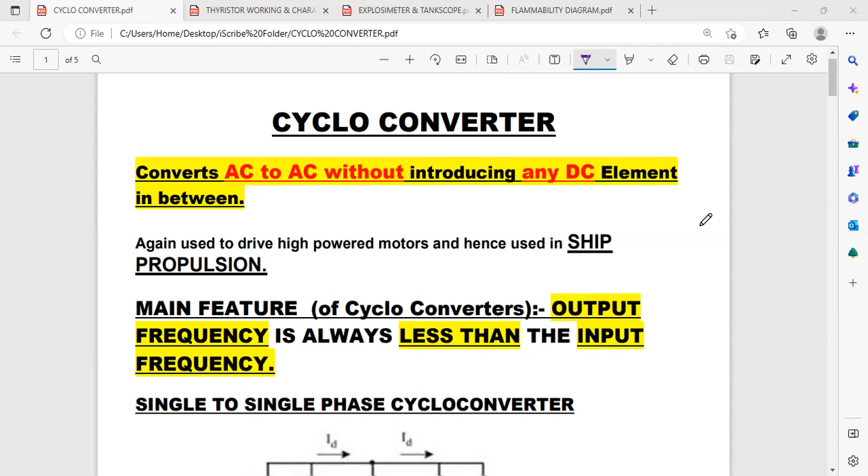Right, so a very quick recap on the cycloconverter we started yesterday. As I said, there was just one small portion with regard to a question, we'll come to that, but let's have a quick recap. A cycloconverter is a synchro converter, but without the DC element. You're converting AC to AC. And when you have a cycloconverter, the output frequency is always less than the input frequency. The two types we discussed were single phase to single phase.

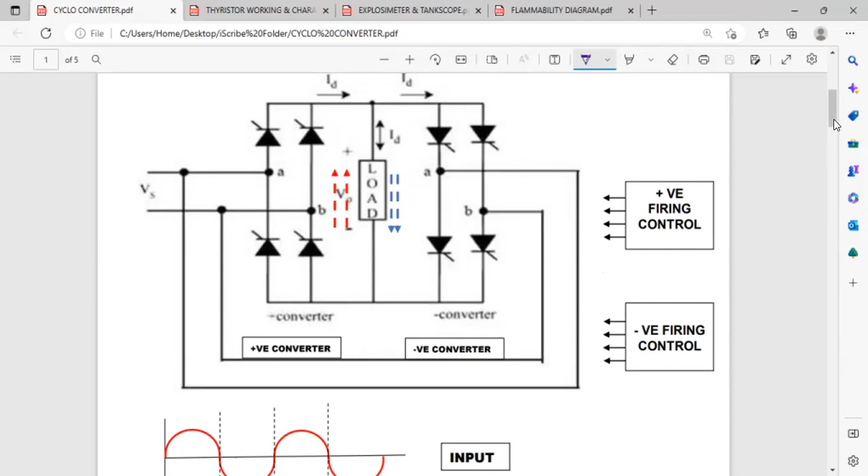Here we saw how AC was converted to AC without any DC element, and the output frequency was half the input frequency. We were getting only one cycle of output compared to 2 cycles of input. So we were getting half the input frequency, meeting the requirement that output frequency is always less than the input frequency.

Then we saw the 3-phase to single phase converter. As I mentioned, this single phase is one phase of a 3-phase synchronous motor - U, V, W, there are 3 phases in a motor. So it pertains to one phase, and 3 phases are then converted into one phase. Yesterday I showed you that you're going to have 3 such similar circuits, one for U, one for V, and one for W phase.

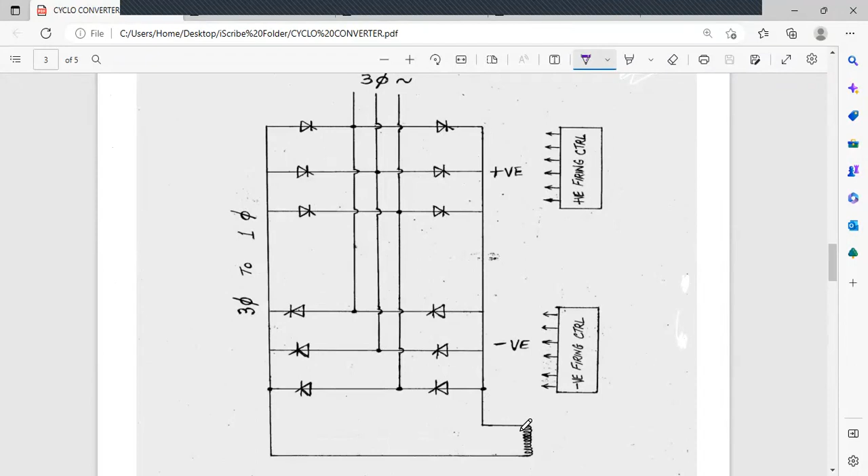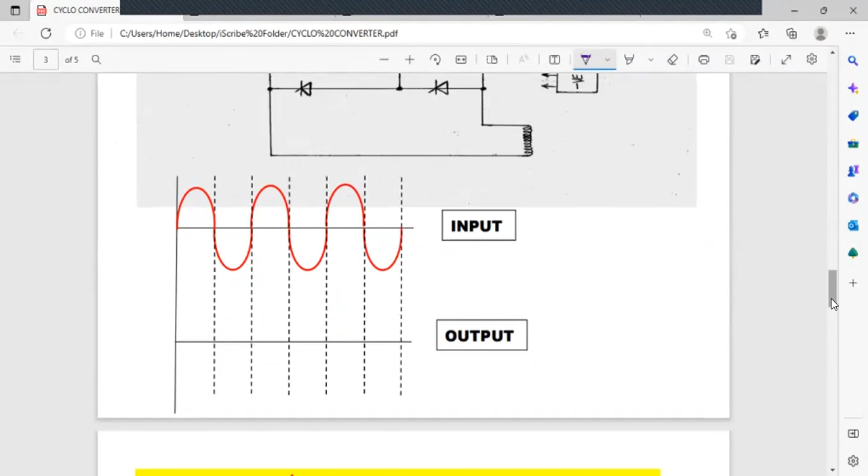Yesterday we also discussed how current flows first in one direction and then in the other direction, resulting in one output waveform as opposed to 3 input waveforms. So the output got only one cycle as opposed to input having 3 cycles, and therefore the output frequency was 1/3 the input frequency. So coming to those questions, yesterday we discussed what is the blocking mode.

If you remember, I said that when your positive converter is firing, your negative converter is blocked from firing, and when your negative converter is firing, your positive converter is blocked from firing. If you allow both of them to fire simultaneously, you would have a direct short circuit. That is what is meant by the blocking mode. Very simple to understand.

And I retained this one for today because it requires a little extra explanation for you all to understand - how we get this so-called internal circulating current, or circulating internal current of a cycloconverter, or for that matter any converter, even your synchro converter. We'll come to know the reason why.

We saw that we were using thyristors. In your synchro converter, three-phase was converted into DC, and then that DC was converted back into AC, again using thyristors. Even in your cycloconverter, we were using thyristors - the positive converter and thyristors for the negative converter, for both single phase to single phase and three-phase to single phase.

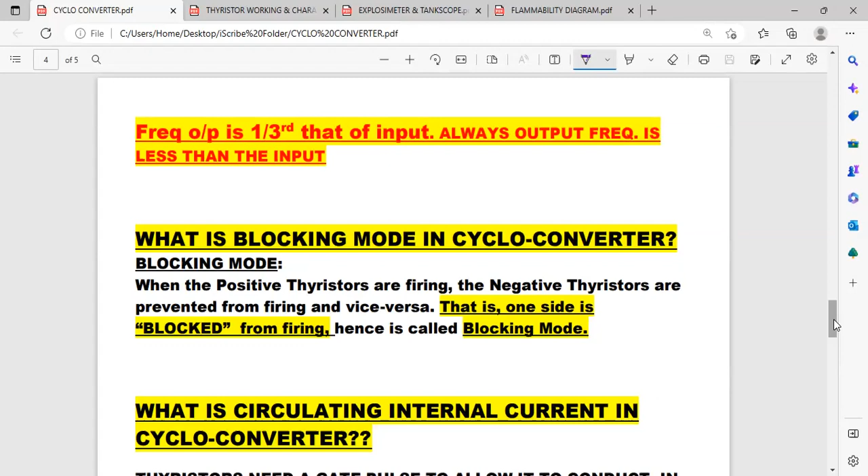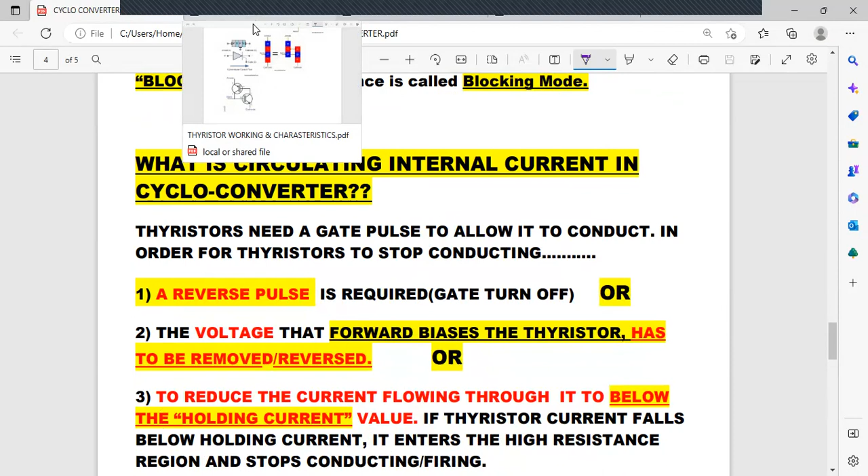Now, to understand what this internal circulating current is, we need to know what things are going to stop a particular thyristor from working. So let's digress to the thyristor. A thyristor is denoted by this symbol - you have the anode, you have the cathode, and you have the gate.

A thyristor will conduct as long as you have positive on the anode and negative on the cathode, just like a diode. But this thyristor is not going to conduct until you get a gate. Then afterwards, if you remove the gate, the thyristor will continue to conduct.

Unless you're getting this gate, in other words, this transistor gets forward bias, that will automatically forward bias this other transistor. Why? Because this collector is connected to the base. So once this transistor gets forward bias, provided there is a gate, this one will automatically get forward bias too.

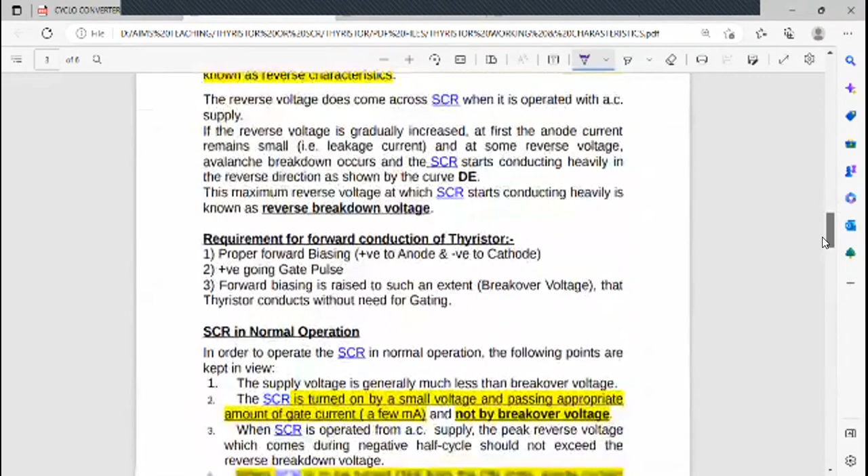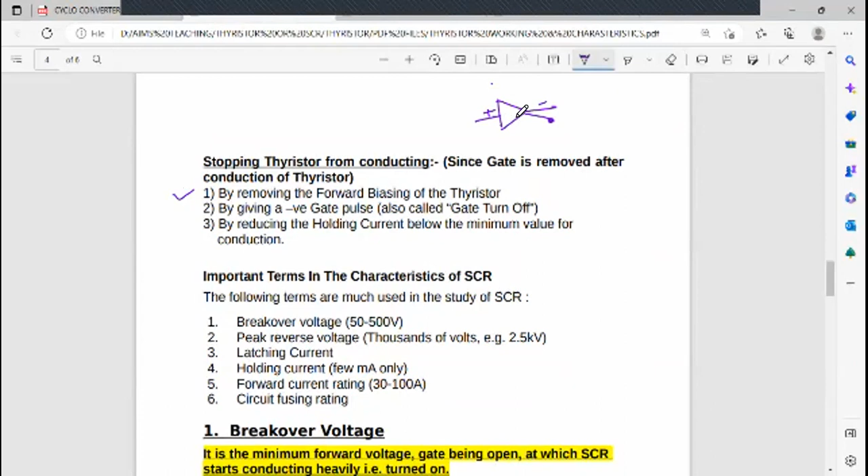Methods of stopping the thyristor from conducting. There are three methods. Number one, by removing the forward bias, that is the positive and negative I told you about. Here's the thyristor, and this is the gate. If you remove this bias, the positive and negative, the thyristor should stop conducting, no matter whether there is a gate or no gate. If you don't have forward biasing, the thyristor should not conduct.

By giving a negative gate pulse. Now we saw from that particular diagram that this has to be a positive because it's NPN. And as I said, this transistor has to conduct first, then this transistor will conduct. So this will have to be a positive gate over here for this transistor to start conducting.

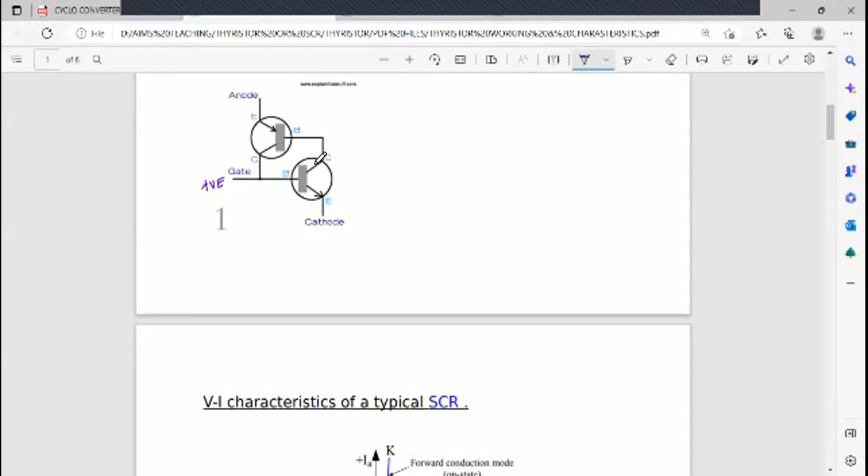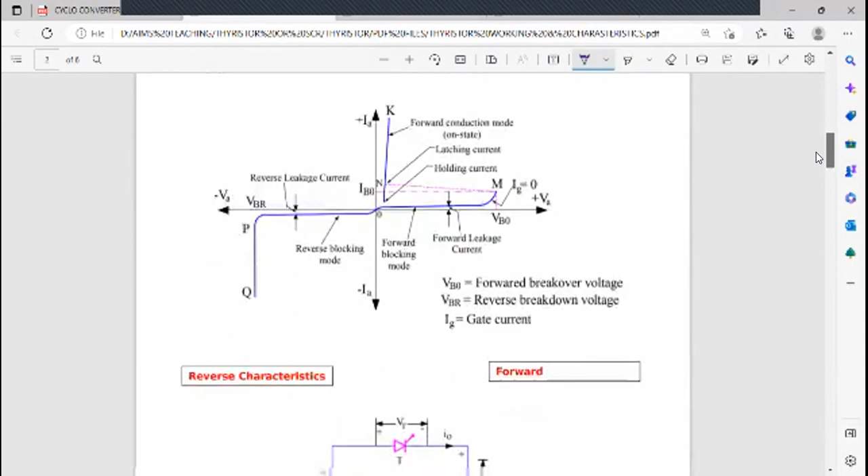A way to stop this transistor from conducting is to take off this and put a negative gate, and that will turn off that particular transistor. If that transistor turns off, then the other one automatically turns off too. So that is called a negative gate, or gate turn off thyristor. That is the second method of stopping the thyristor from conduction.

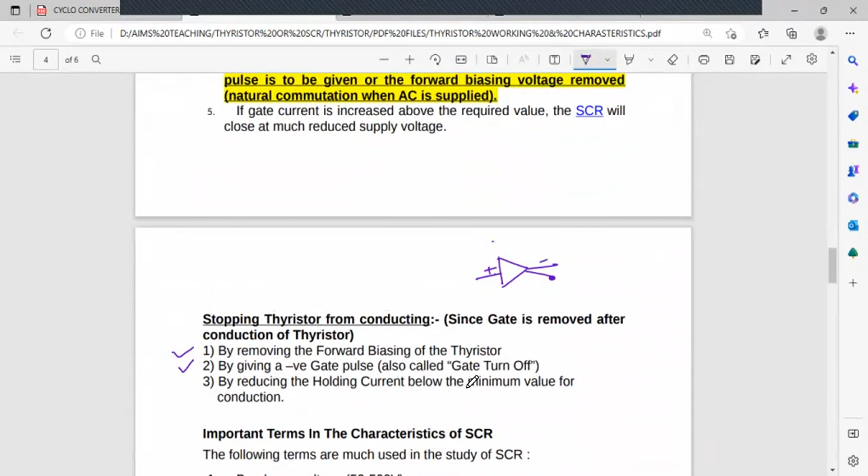The third means is by reducing the holding current to below the minimum value for conduction. Let's go to this particular characteristic. This is when the thyristor will conduct if you're going to force it to conduct without a gate. So what are you doing? You're taking it to a very, very high voltage. And as you know, even if you take a diode to a very high voltage, it is certainly going to start conducting.

Instead of taking it to a very high voltage so that it can conduct, we can make that same thyristor conduct at this particular point. Let's say this was around 1000 volts for it to conduct normally. We are using this, say, at about 100 volts roughly, it depends from thyristor to thyristor. At 100 volts, you're providing that gate, and by providing that gate, you're making the thyristor forward biased and thus conduct at a much lower voltage.

This particular voltage is called the forward breakover voltage. We are not interested in that; we are interested in this, thus making the thyristor conduct safely. There is a possibility that your thyristor can get damaged, and therefore nobody does that. So what did we say? We can reduce the forward bias voltage.

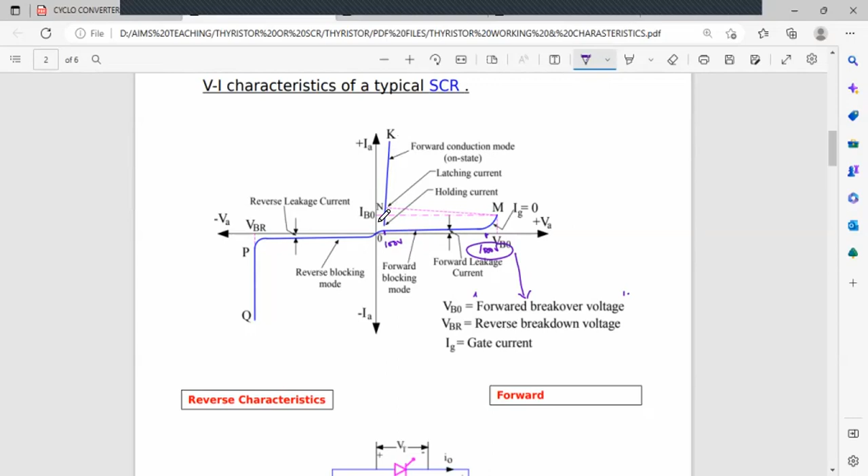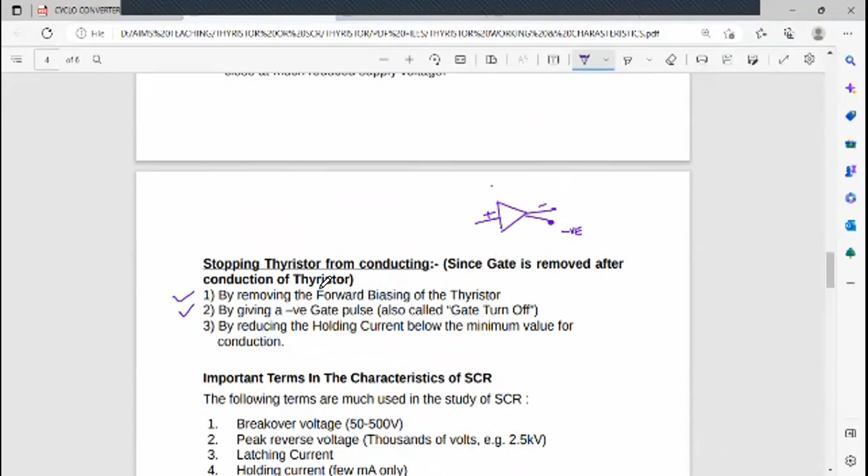So, three methods of stopping the thyristor from conducting. Number one, by removing the forward bias, that is by removing this positive and negative from the anode and cathode respectively, or by giving a negative gate called a gate turn off. And the third one is by reducing it below the holding current level.

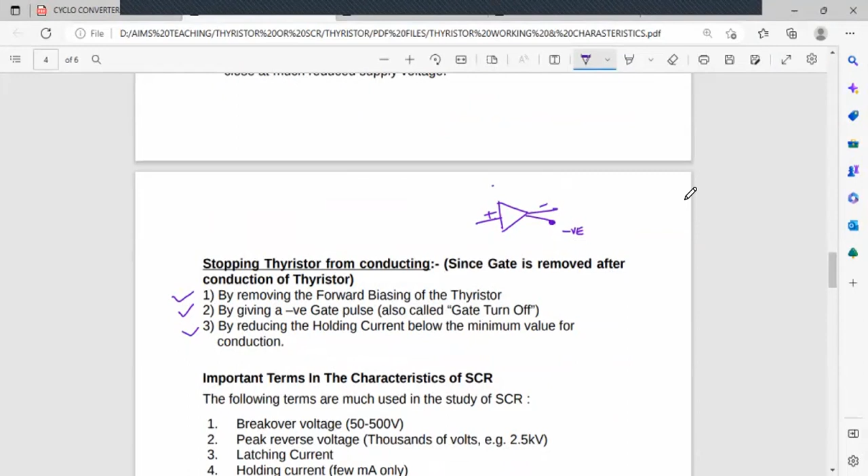So now we know that the thyristor turns on with those conditions. Now, what I'm going to draw here, please pay particular attention. I'm drawing a sine wave.

Okay, from a negative value, we've reached 0, and then it is going into a positive value, reducing back again to 0, then going to a negative value, and then coming back to again 0.

Now, this thyristor, which is used in those particular converters and inverters, remember we are calling conversion means converting it from AC to DC, and then inverting it from DC to AC, or going from AC to AC directly. So whether it is a synchro converter or a cyclo converter, we are always using the AC element over there. We are not using a DC element to forward bias this thyristor. Therefore, at every instant, you're going from 0 to a positive, coming back to 0.

So at the 0 crossover points, your thyristor should stop conducting. So when it is going positive, it should conduct. You're going to have plus and minus. And when it comes to 0, this should go, isn't it?

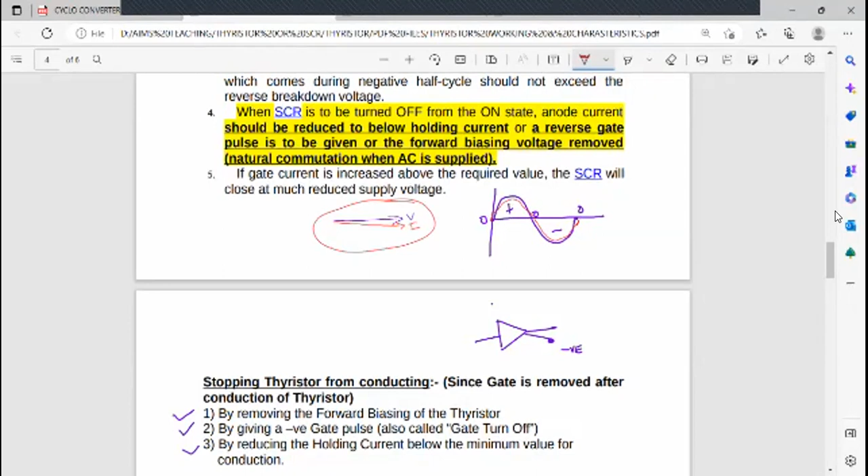What type of circuit is this, where your current is lagging your voltage? What type of a circuit is it? Anybody? 12 people are online. Inductive, sir. Yes, it's an inductive circuit.

This particular thing becomes an inductive circuit because your current is lagging the voltage, no matter how much current is flowing. Even a small flow of current, when your voltage becomes 0, makes it an inductive circuit.

Please bear this in mind because we are going to tackle something else in the next chapter, which is your shaft generator. So everybody's understood what is the internal circulating current? It is the current that still keeps flowing, though very, very small, when your voltage has become 0. In other words, your biasing voltage across the thyristor has turned to 0, where the thyristor should have normally stopped conducting, but there is still a very small current.

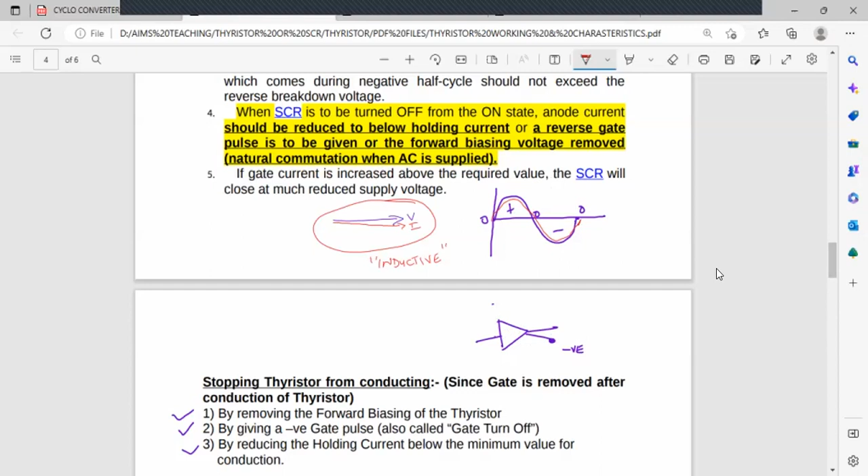You can call it a leakage current if you want to call it that. Then that thing is called the circulating internal current of a cycloconverter, or even a synchro converter, because we are using these very same thyristors.

Right, so having seen that, this is the answer. There is a fraction of time lag where the current is still flowing through the thyristor before it is switched off, while the voltage in the circuit has already fallen to 0.

Right, so now we will move to the other part, which I have not opened out yet. Give me a moment. Which is your shaft generator.

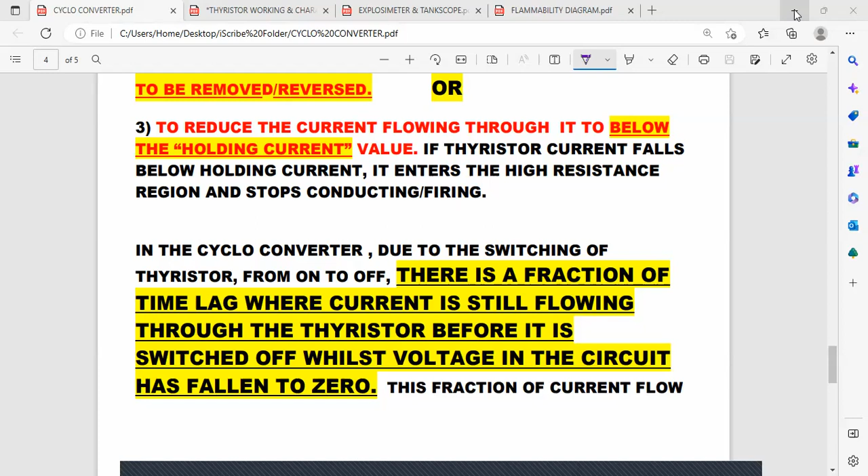Okay, so this is your shaft generator. And I request you to retain in mind what I mentioned about the internal circulating current of a cycloconverter or synchro converter. It is that little current that is still flowing despite the biasing voltage of your thyristor being already at 0.

Now coming to the shaft generator. For that matter, any generator, you need a prime mover. Here, in this case, the prime mover is none other than your main diesel electric engine. That is acting as the prime mover. Okay, so here is the block diagram of it.

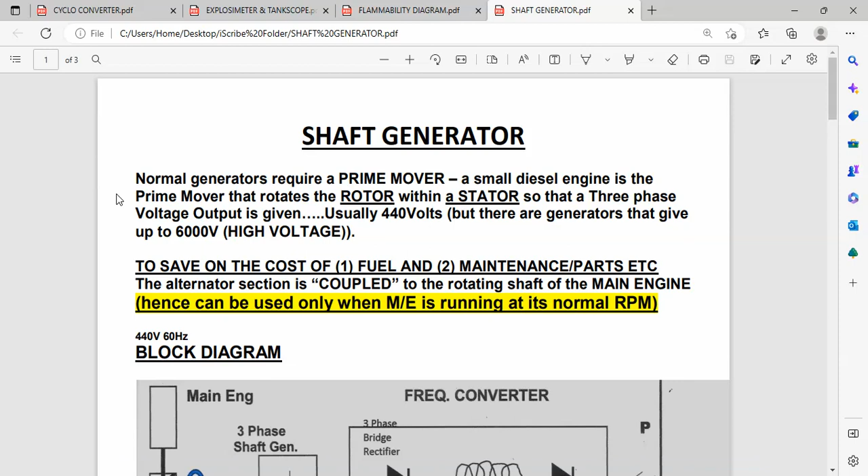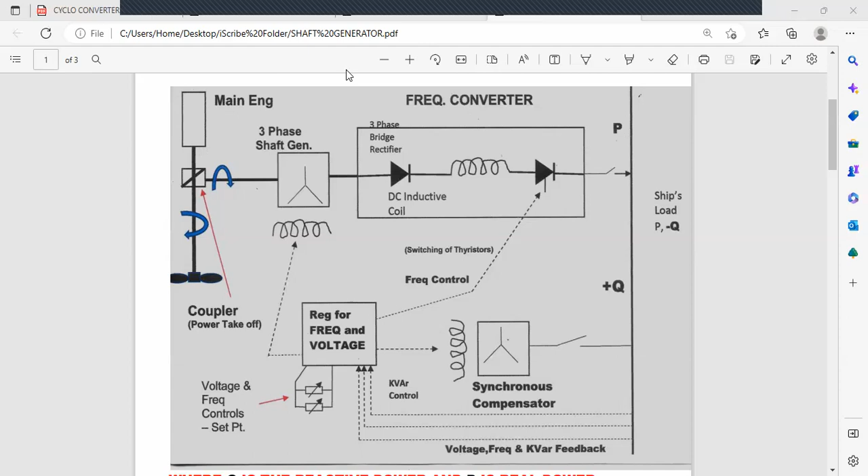Generally, if it is ever asked in your orals about the shaft generator, they ask you to draw and explain. Never mind the writtens, but in the orals also, they ask you to draw and explain the shaft generator and how it works. So we have your main engine acting as the prime mover, right?

And when this is acting as a prime mover, what is your RPM of your main engine? I don't think it is anything greater than, it is always less than 150 RPM. Unless you are on a man of war, that is your normal naval vessels, but we are not on those type of vessels. We are on a normal cargo vessel. So I don't think there is any main engine that is going at 100, even at 150.

I do not know, I worked on a ship that was giving me 125 RPM. So it depends, you might be having a high-speed diesel engine, but most of the engines fitted on board big cargo vessels are slow-speed diesel electric engines. They are not medium or fast-speed. Those are installed on your naval vessels.

Okay, let's assume 150 RPM, but it's generally less than that. And you're having your alternator for your normal generator, a brushless alternator. Now, if you have seen your brushless alternator, that shaft is turning at around 800 to 900 RPM. What is this? I said less than 150 RPM. Let's take it as 150 RPM. Where is 150 RPM? Where is 800 to 900 RPM?

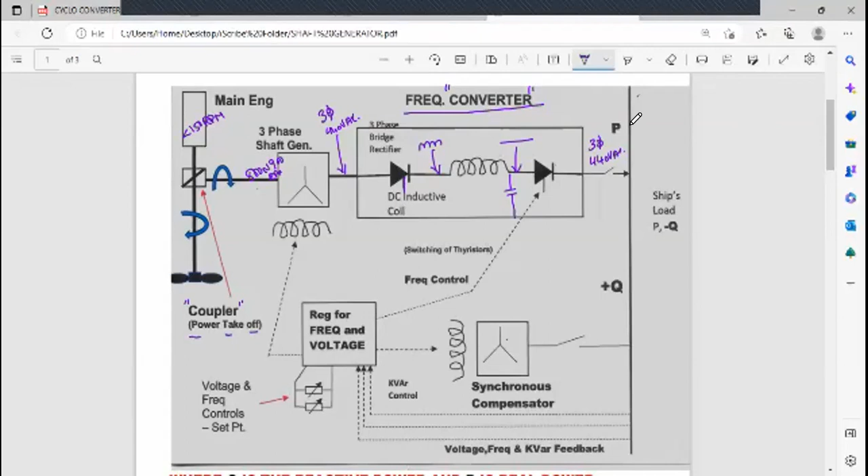Okay, then, of course, you're having the smoothing out elements. The capacitor is not shown. And you have a smooth DC waveform over here. Then this DC is inverted back into three-phase 440 volts of AC. And through your ACB, it is then switched on to the ship's load.

Now notice this thing called minus Q. What is this minus Q representing?

Reactive power. Sorry, your voice is garbled. Reactive power. Reactive. Yes, correct.

If you're going to have that reactive power, okay, very quickly, a recap of the power triangle. So this is your power triangle. This is your real power, kW. This is your kVAR, reactive power or wasted power. And this is your kVA, apparent power.

So if this is going to increase, in other words your theta is going to increase, in other words your power factor is going to decrease. So this is very correctly, as you all said, reactive power.

And this reactive power is because your ship's load is inductive in nature. Your ship's load is inductive in nature. Why? Because we are having so many motors, so many heating coils. So a lot of coils are there in that circuit, making it basically an inductive load.

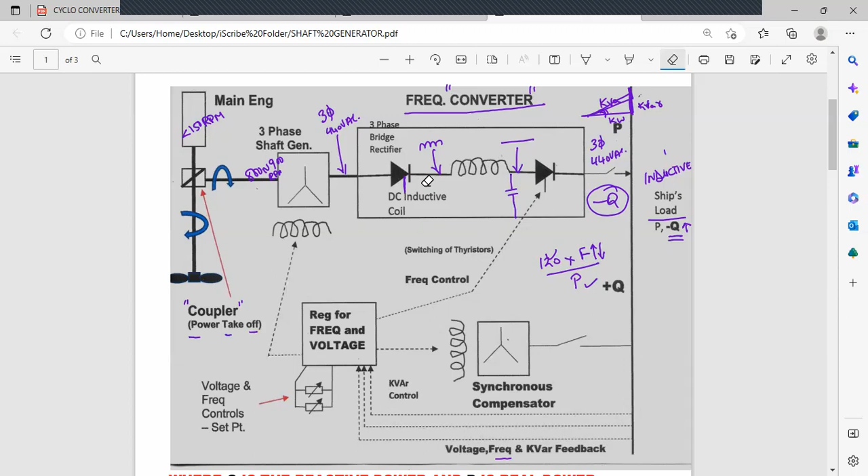But in the same manner, this frequency over here is being adjusted constantly due to the feedback one is getting, and then the firing control circuit takes over and fires these thyristors accordingly. So your frequency that is going to be on this particular thing will be kept as close to 60 hertz as possible.

So we've seen how we control the voltage, we've seen how we control the frequency by the firing of these thyristors. Now we have to take care of the kVAR. We don't want this minus Q to be added to make the ship's load even more inductive in nature. So therefore, you are having a kVAR feedback from your main switchboard to this very same circuit that is already controlling voltage and frequency. It is also giving you an excitation for your kVAR control.

And this excitation is to your synchronous compensator. The synchronous compensator is nothing but a synchronous motor, just running by itself. It is not connected to any load, such as we saw that synchronous motor in this thing, and we'll see two videos also shortly after I complete this topic, on the Azipod which is driving your particular vessels, merchant navy vessels, even sometimes your passenger vessels.

So if somebody has taken the topic of motors and has done synchronous motors with you, a synchronous motor requires its rotor to be supplied voltage.

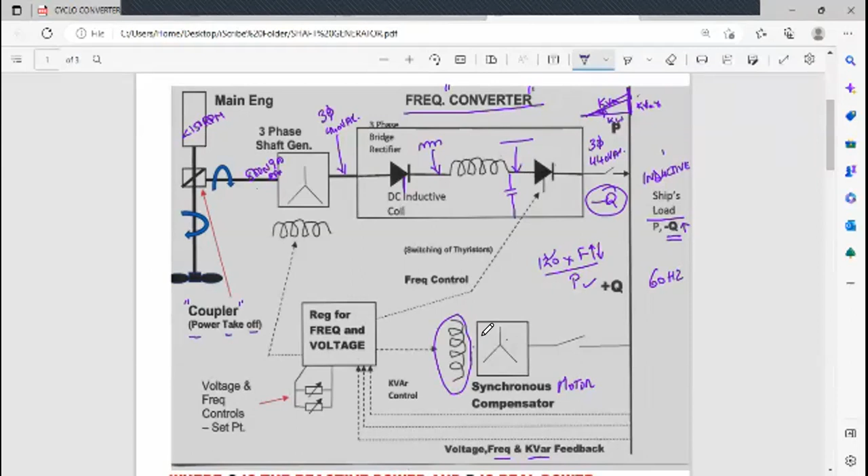This is that rotor winding. If the synchronous motor is overexcited, that means you're overexciting it by this particular voltage, then your minus Q is taken care of, because you're adding a plus Q.

If you don't need that excitation, it will be normally excited, so neither plus nor minus Q. And if you want it to be more inductive in nature, then you give it a minus Q, so it will be under excited - either overexcited, normally excited, or under excited.

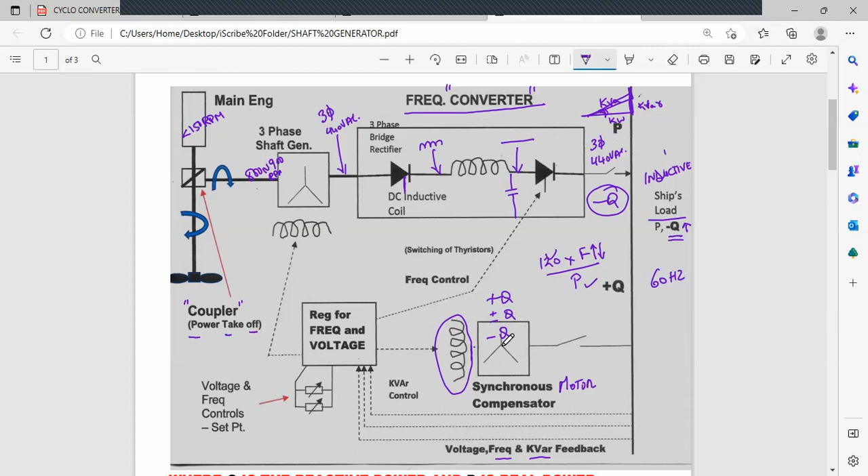If it is overexcited, that means your current will be leading the voltage. In other words, it becomes a capacitive circuit. That is why it is called a synchronous compensator, where this motor behaves like a capacitive circuit.

Instead of this, you could have had a bank of capacitors, like we saw when we were doing the static AVR. You could have that also.

So this synchronous compensator, which is nothing but a synchronous motor, is going to give us this plus Q, as you can see over here, and that is switched on to the main switchboard. So depending on the feedback of your minus Q, this is going to give you that much extra excitation to compensate with a plus Q, and that's how this minus Q is negated.

Your KVAR is reduced, your power factor is increasing, and the overall efficiency of this particular generator has also increased. Everybody clear?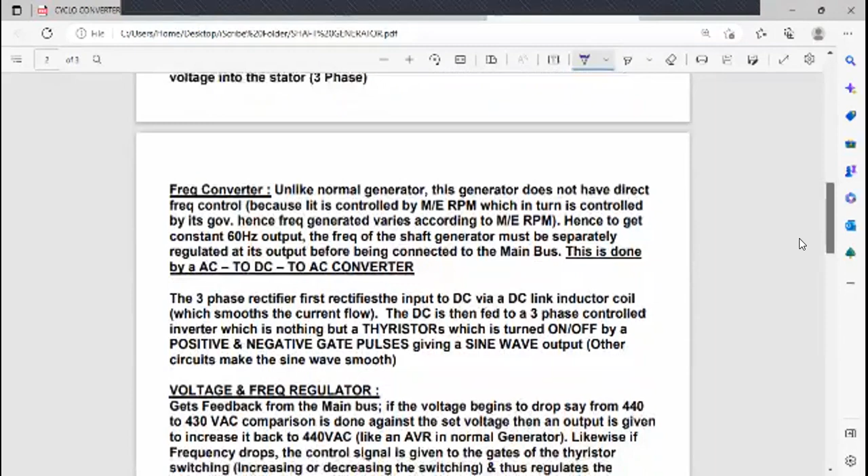We'll see the advantages and disadvantages of your shaft generator, and then we'll see those two videos related to the converters used as electrical propulsion.

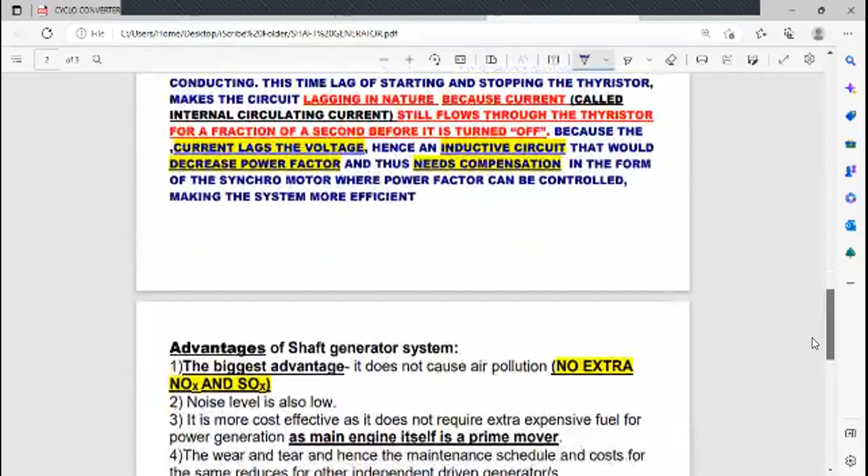So what are the advantages of your shaft generator system? The biggest advantage: no extra air pollution, since you're not using an extra generator. These days we are having a scrubber retrofitted, I believe.

In my time, that was still under discussion. Those that don't have it will have to always, whenever going into the SECA areas and such, use special fuel - both for the main engines as well as for the diesel generators, because NOx and SOx are produced.

So if you're not using an extra diesel generator, only your main engine is polluting - that is, if you don't have a scrubber. I don't know when it's going to become mandatory, but sometime in the very near future it's going to become mandatory.

But many ships have already started retrofitting a scrubber so that whatever exhaust comes from the main engine and your generators is cleaned, and all that you get out is only nitrogen and water - two non-polluting elements, clearing this NOx and SOx. So one of the big advantages is already your main engine is covered by that - no extra NOx and SOx to pollute your atmosphere.

Low noise level: suppose 2 or 3 generators are running, you just shut down one of those generators and there is a marked improvement in noise level. Whenever no generator is running and only your main engine is turning to produce voltage via the shaft generator, it's just the noise of the main engine, since the other generators are at standstill, and therefore noise is reduced.

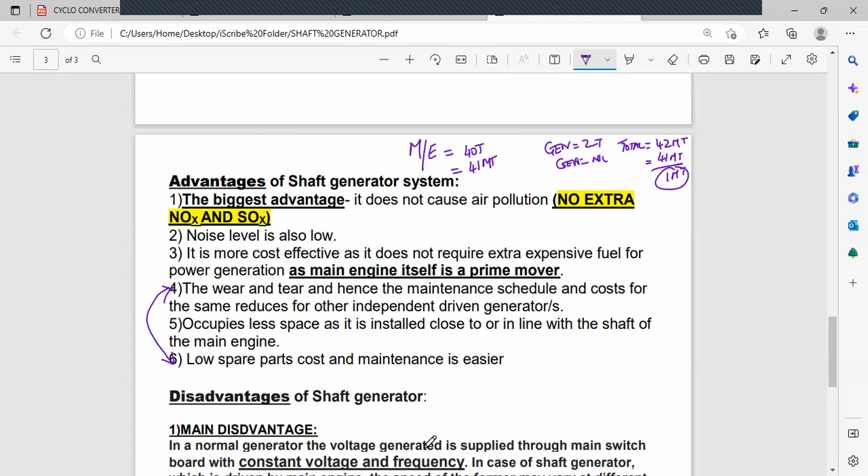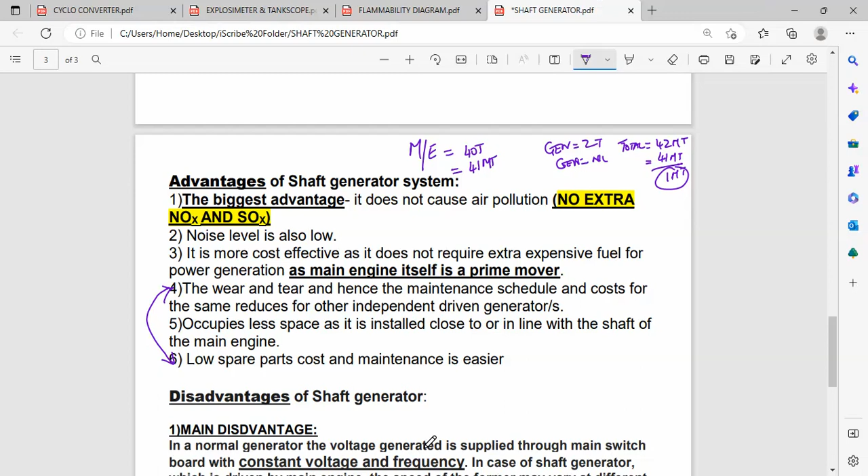Number 6, low spare parts cost and maintenance is easier, coupled with number 4 - both are interrelated. The only maintenance the engineers have to do as far as your shaft generator is concerned is that coupling, the PTO I spoke about, and the thing for coupling to that gear. That is all the maintenance they have to do. Whereas you as an electrical officer will have to do the routine alternator maintenance, as you would do for the other alternators. So those are the advantages of your shaft generator.

For the advantages, you also have disadvantages. The main disadvantage is that your main engine is pushing your ship through high seas. You might run into heavy weather, where you're getting headwinds, head swell. The ship is pitching and rolling, in other words your RPM will never ever be steady. It can fluctuate up to 150, might even come down by 20 RPM. Of course, if it goes below a certain set value, then you'll have the main engine tripping.

With so much RPM fluctuation, remember that when the RPM changes, the field that is cutting your stator field from your rotor coil will also reduce. Therefore your output voltage will keep varying - reducing, increasing, reducing, increasing. It's a continuous process whereby the AVR has to be in continuous operation in order to keep the voltage as constant as possible.

Likewise with the frequency - if the speed falls, remember the frequency also falls, and vice versa. So the frequency, the firing also has to be taken care of. There will be an input saying, okay, now my speed has fallen, please fire it faster.

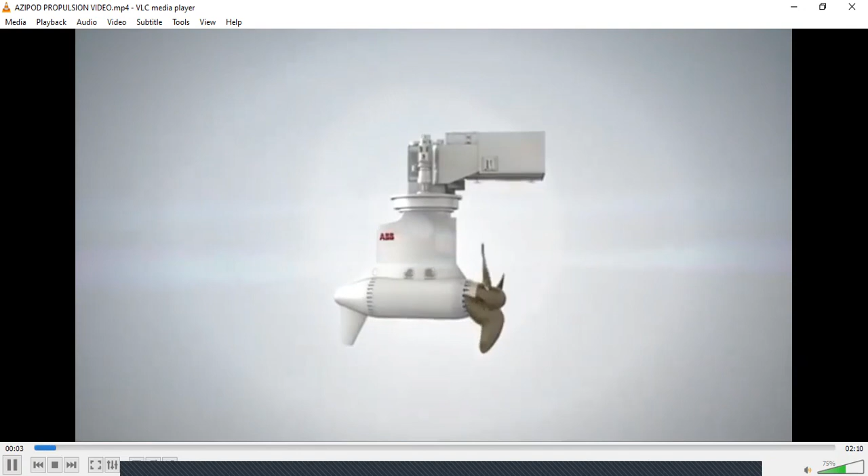Scenic's first discovery yacht, Scenic Eclipse, will feature the latest version of the advanced Azipod propulsion system, Azipod D, which won a prestigious Marine Engineering Award in 2015.

Azipods are unique in that they position the electric motor directly next to the propeller, which eliminates the gear and drive shaft noise and vibration associated with other propulsion systems. Guest comfort is always a high priority, and Azipods have the lowest noise and vibration levels of any large ship propulsion system, which also offers minimal disturbance to marine life.

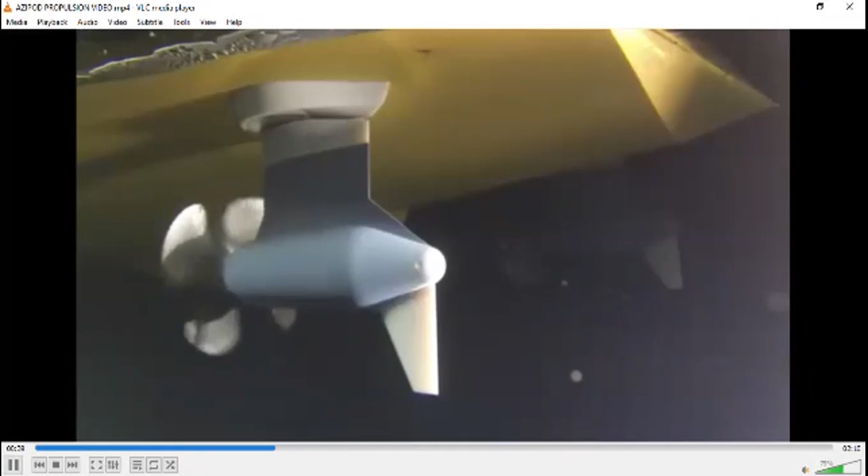Azipods are also friendly to the wider environment, being up to 20% more fuel efficient than standard systems, and also allow slightly increased speed for installed power output. Working in conjunction with our state-of-the-art GPS dynamic positioning, they keep the ship stationary without the use of anchors.

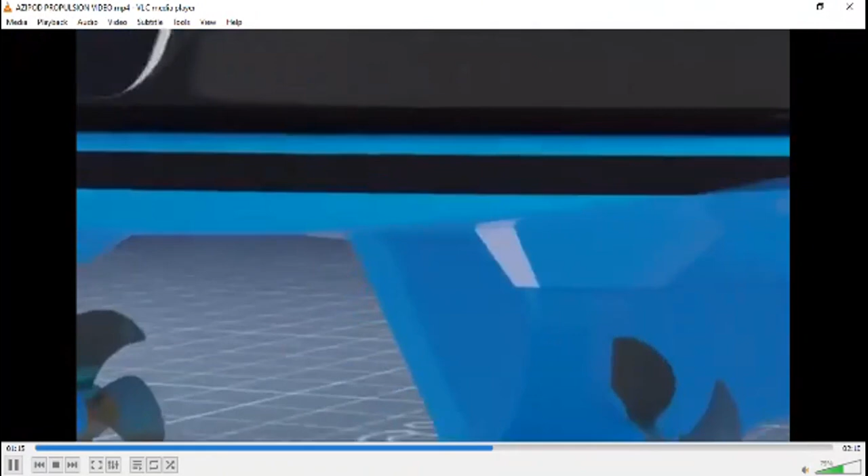However, Azipods really come into their own in the challenging polar regions, and is one of the reasons why Scenic Eclipse will have the highest passenger ship polar classification, PC6, Ice Class 1A Super, allowing a wider safety margin and sphere of operations in Arctic and Antarctic regions.

This system enables a ship to break ice using a revolutionary principle that greatly improves the maneuverability of ice-going vessels. The rotating unit allows the propeller thrust and wake to be directed against the ice, working in reverse to clear a channel for the ship. It can even break through an ice ridge.

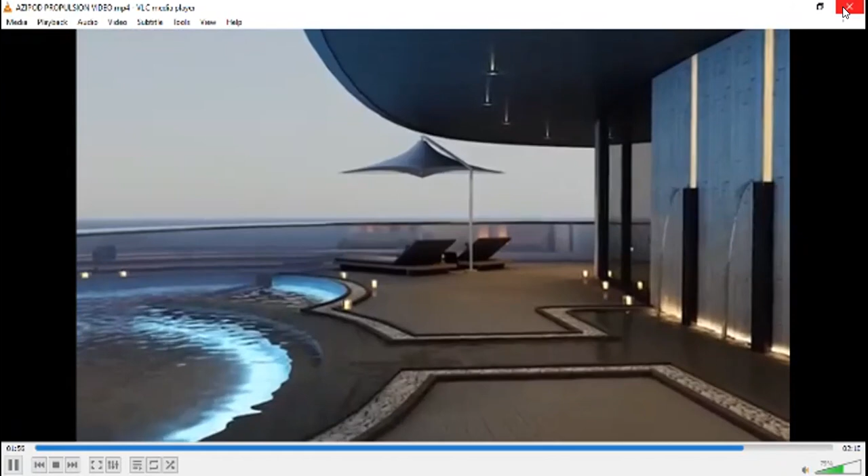There's no need for icebreaker assistance, thanks to the safe and efficient operation capabilities of the Azipod. All these innovative features allow Scenic Eclipse to do what it does best: provide her guests with the ultimate luxury cruise experience, no matter what the outside weather conditions.

Scenic Eclipse, the world's first discovery yacht.

Okay, so this is one video, and now you'll see it on one of the bigger passenger vessels. We won't see the entire video over here, only the relevant parts.

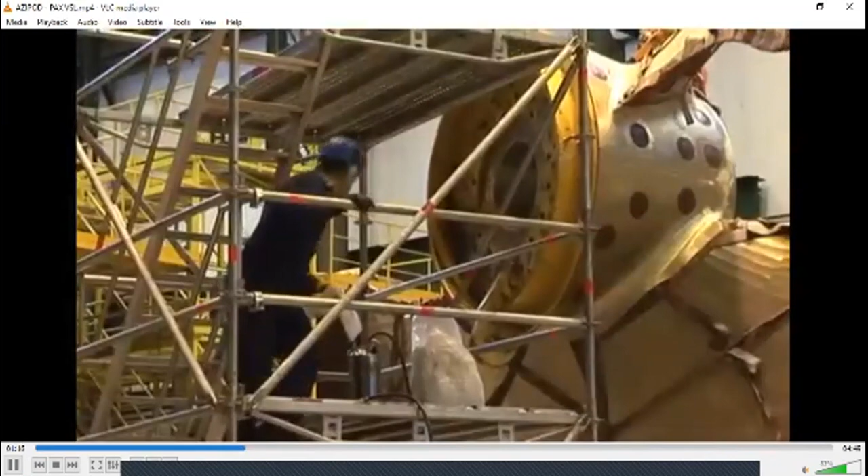Two azipods that we have now. In the Freedom, we have two azipods that are the maneuverable ones, the ones that we can rotate 360 degrees. And then we have one fixed pod, which is fixed in its position, and it pushes. But the azipods are actually pulling, the propellers are in the front.

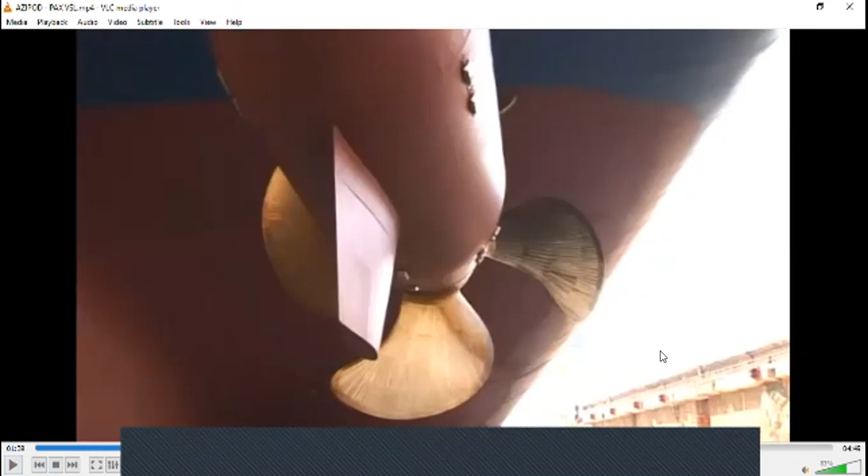So in the case of this particular vessel, these azipods, instead of being located behind of the vessel, they are located forward of the vessel. So as the captain has mentioned, they are going to be acting like propellers of a plane, pulling the ship forward, rather than providing thrust. And then you're having one stationary one from behind, so you're getting both pulling forward and pushing, a push-pull sort of arrangement, very much like you'd have on an airplane.

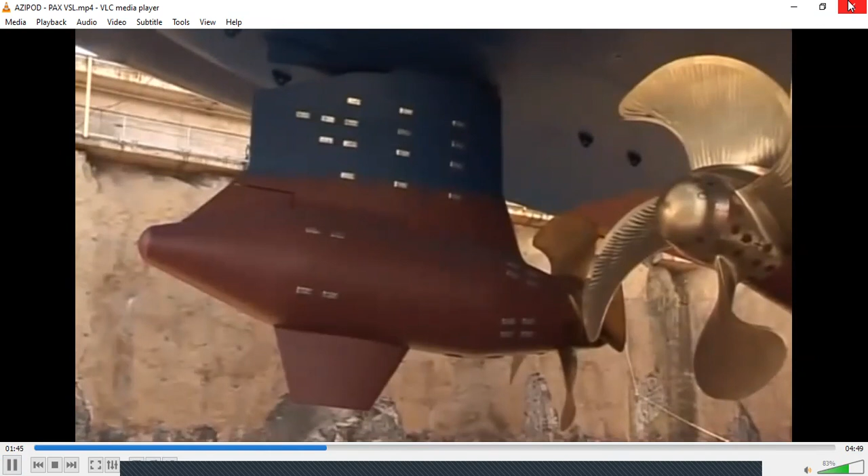And the advantage of that is that the propellers then are working in a much purer environment. The water flow that's hitting the propellers is much more laminar than the case of a propeller that is working at the end of a shaft. So vibration is not a problem at all with the azipods.

The ability to direct the thrust exactly where we need it, the ability to do a crash stop, for example, keeping the propellers rotating the way that they are, and simply reversing the direction of the propeller 180 degrees, is a huge advantage. So certainly azipods have made a significant contribution to the overall safety levels that we're able to operate under.

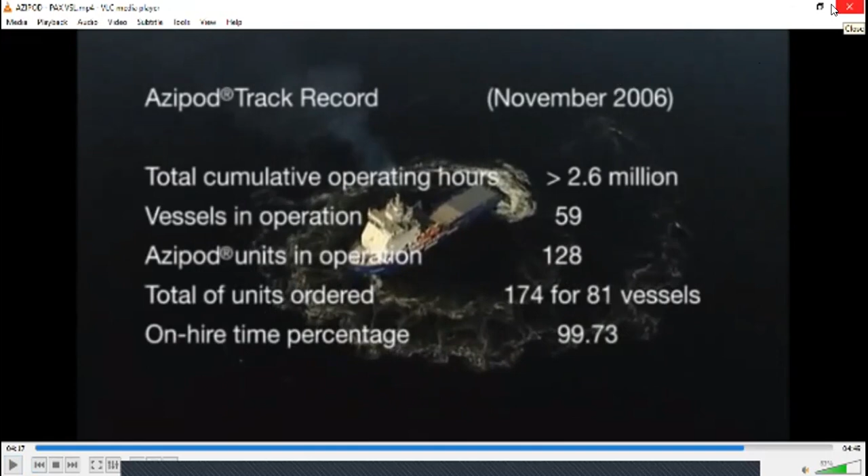So two very interesting videos which were related to the azipod that was using the synchronous motor. And for the synchronous motor to work, we were using either a synchro converter or cyclo converter. Nowadays, they are preferring the cyclo converter for the simple reason that you are not going to have any extra components in the form of converting from AC to DC and then back into AC. You are going to convert directly AC into AC. Right, so that was the topic on converters.

And as an offshoot for the converters, because we were using one of those converters in your shaft generator. Any queries or doubts on any of those topics that we covered in those chapters before we move forward to this particular one? Portable gas detection equipment.

Okay, so this topic, portable gas detection equipment, we'll be seeing the explosimeter, the tankscope, the multi-gas detector, then standalone O2 detector in the form of your O2 analyzer.

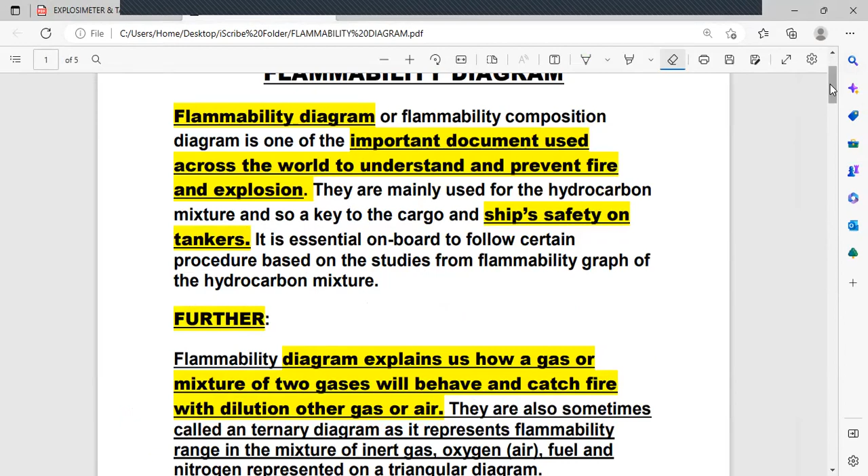So in the orals, they will ask you what is the flammability diagram, draw and explain. What is the meaning of flammability diagram? So what is the flammability diagram? The flammability diagram is a document.

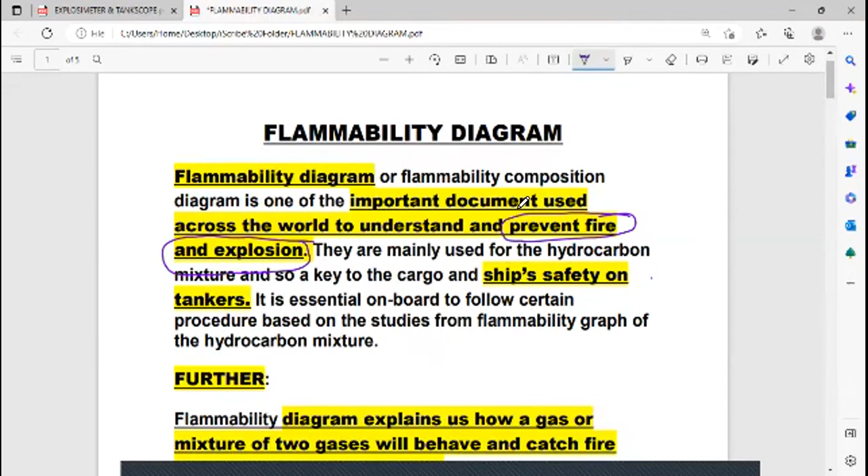It is an important document, an important safety document, used across the world. In other words, worldwide, irrespective of whatever your flag is, whichever country you go to, North Pole, South Pole, it is going to be there. Worldwide, in order to understand -- and bottom line is to prevent a fire and explosion. This is the bottom line. We want to, at any cost, prevent a fire and explosion on board our ships, because that could lead to some very disastrous consequences, even the loss of life as well as the loss of the ship itself. So it is an important safety document that is used across the world, or worldwide, in order to prevent fire and explosion.

Generally used on tankers, but as I said, you can also have it on board your bulk carriers, because bulk carriers are carrying coal. That coal is going to emit methane, and methane is a flammable gas, so it can come in useful there as well.

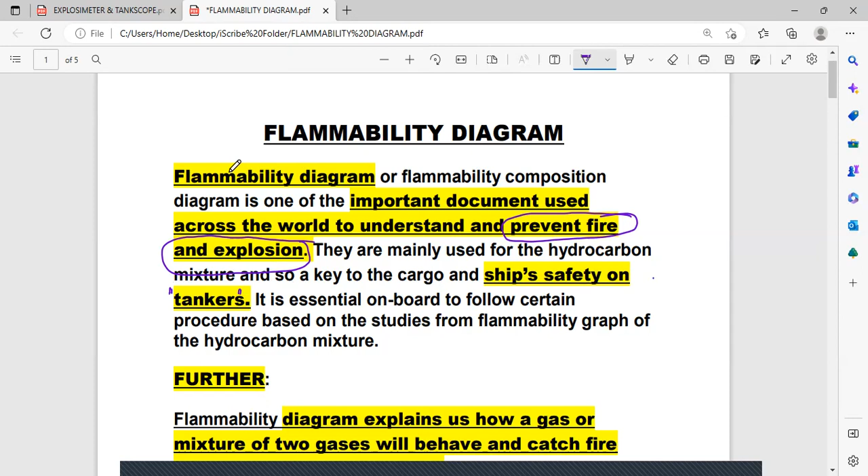The definition of the flammability diagram does not end there. It further explains how a flammable gas, or a mixture of two gases, will behave and catch fire with the dilution of another gas or air. Air has to be there for anything to burn. What is this other gas? This pertains only to those on board tankers, and that other gas is none other than your IG, inert gas.

So this is the definition of the flammability diagram. It is an important safety document used worldwide to prevent fire and explosion. It also tells us how a flammable gas, mixed with another gas together with air, will cause a fire despite having your IG, the third gas.

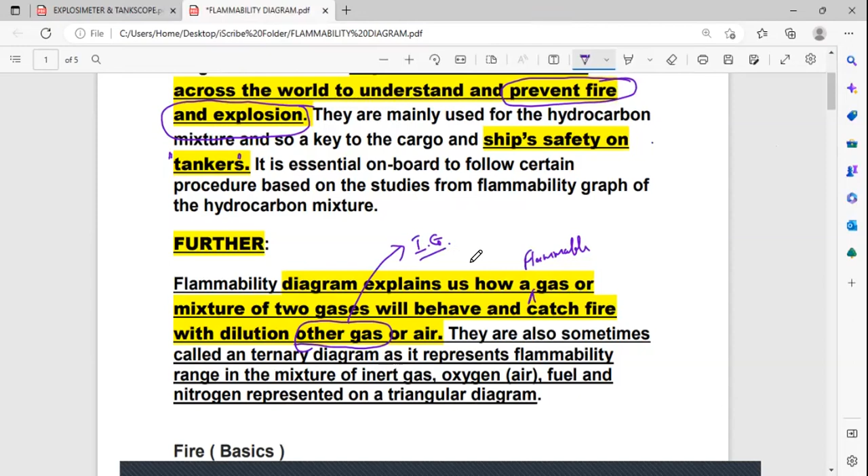Let's see what that is all about. I'll sometimes refer to this diagram, but mostly I'll be referring to this one. All that you have to remember is that this line from F to I should actually be slightly slanting towards the y-axis, and this other line, which I've drawn slanting too much towards the y-axis, should have been more vertical in nature.

That's all. Starting with this diagram, the x-axis is demarcated with oxygen in percentage volume, from 0% right up to 20.9, rounded off to 21% O2. On the y-axis is given your hydrocarbon gas, that is the flammable gas, in percentage volume.

Now we are going to see the other things related to this flammability diagram. This slanting line - as I said, in the orals it is asked to draw and explain the flammability diagram. You draw the x-axis and y-axis, mark them accordingly, and then draw this slanting line, more or less like this. The examiner will stop you and ask, what does this slanting line mean?

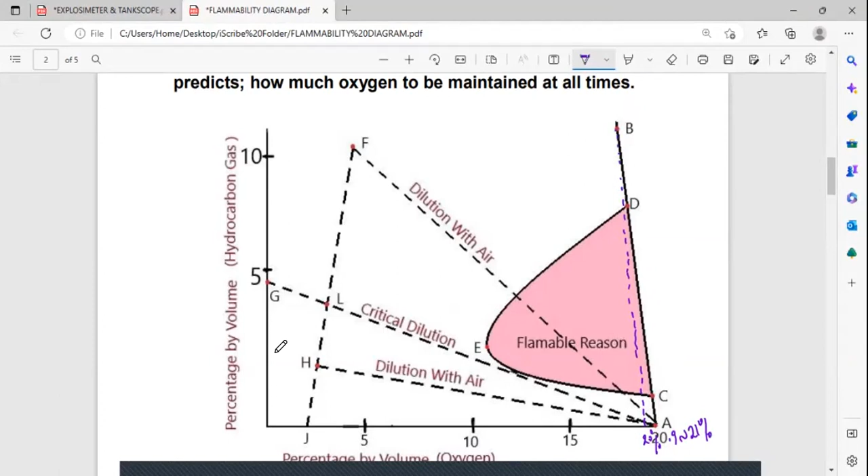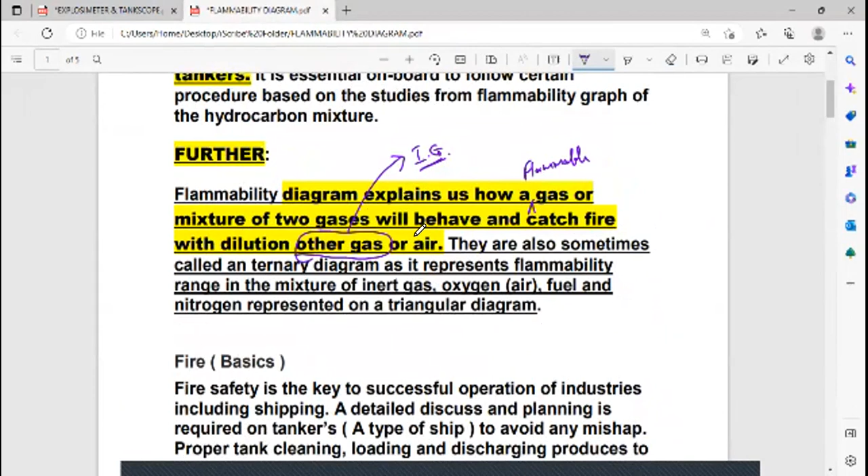That is what is your line AB. Anything to the left of this line AB contains that third gas we saw in this definition. The diagram explains how a flammable gas or a mixture of two gases will behave and catch fire with the dilution of another gas, that other gas being inert gas, IG. So anything to the left of line AB, going in this direction, has that extra gas called IG, or inert gas. That is your line AB.

What is this line AC or CA, and line BD or DB? Line AC represents more air than your flammable gas. When talking about more air than your flammable gas, remember, for the triangle to come together, you have to have sufficient amount of air or O2, sufficient amount of fuel, and sufficient amount of heat. When they all come together in the right proportion, you are having a fire and explosion.

Now, in this case, below this point C, we are in a place where we have so much air, little or no hydrocarbon gas.

It is like this: tomorrow prices of petrol are going to go up, so everybody rushes to the petrol pump and buys petrol in cans and brings it home. Normally you're not supposed to do that, but let's take this as an example. You brought it home and find you don't have any covers for these cans, so all the cans are lying open. Of course it's going to be a loss for you because that petrol is going to evaporate. The thing that evaporates means there are going to be fumes, that flammable gas. Remember, it is the fumes or the gas that burns, not the liquid itself.

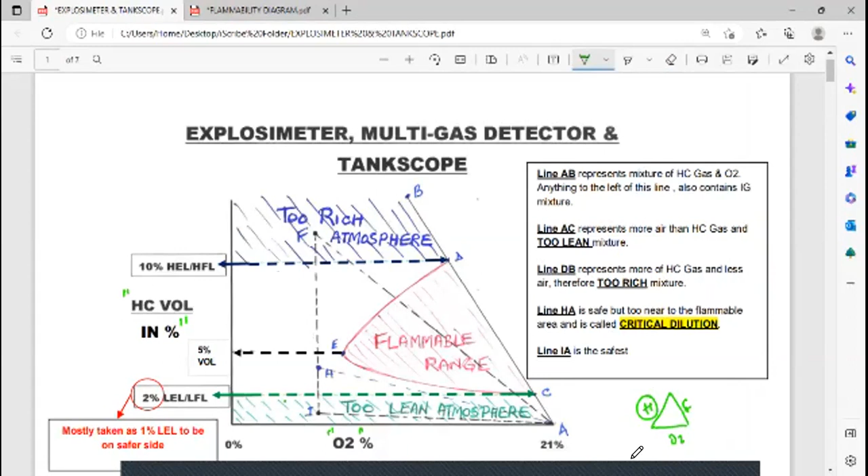Point C, being the lowest concentration of gas, is called the LEL, lower explosive limit, or lower flammable limit - both mean one and the same thing. It is the lowest concentration of that flammable gas or vapor in air that is capable of causing a fire or explosion in the presence of an ignition source. Below point C, represented as line AC or CA, becomes too lean an atmosphere. So that is LEL, LFL - LFL standing for lower flammable limit, LEL lower explosive limit, both mean the same thing.

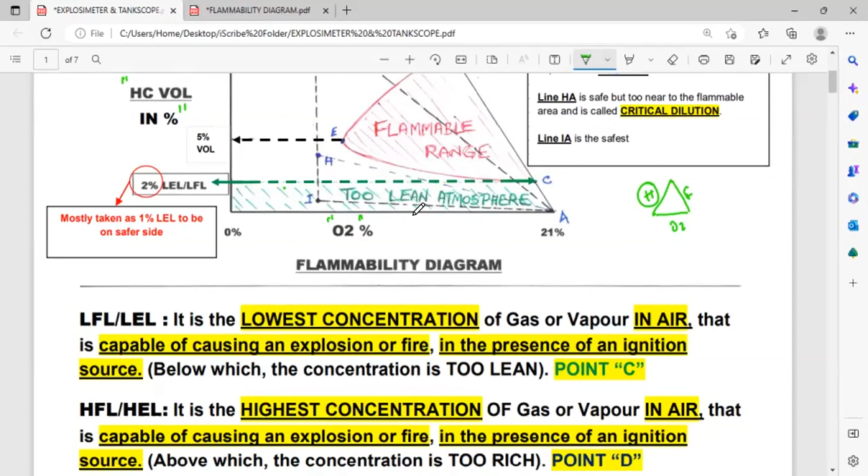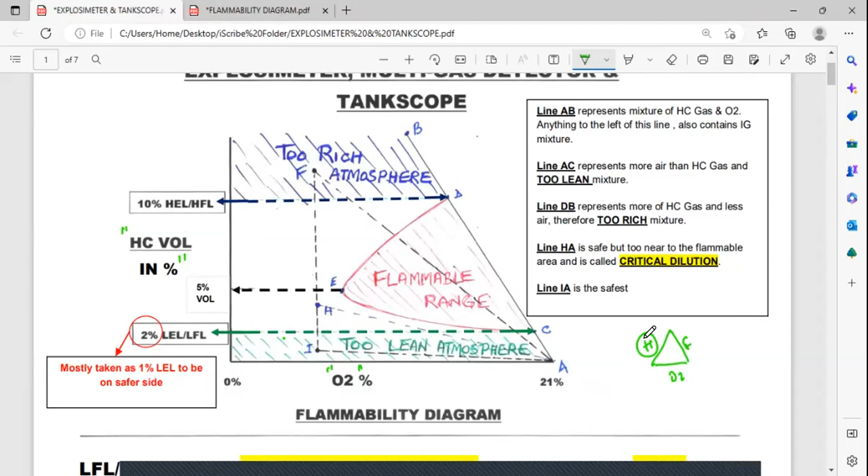Opposite to point C, we have point D. If this is the lowest concentration of that flammable gas, point D will be the highest concentration of that flammable gas, which will have sufficient O2 since we are still on this line AB. Remember, line AB is that flammable gas plus O2, so there is sufficient amount of O2. Now when the line is slanting, it comes quite far away from 21%. So now if you draw D - and that's why I'm saying, looking at this line, it should have been straighter in my diagram - you will see that it is still very close to 21% over here. So that means you're going to have enough O2, and you have the highest concentration of this gas. All that you require once again is this ignition source, and you will have a fire and explosion.

So HEL, HFL - HEL higher explosive limit - is the highest concentration of that flammable gas or vapor in air that is capable of causing an explosion or fire in the presence of an ignition source. Anything above that becomes too rich an atmosphere, and no matter if you provide an ignition source, you're not going to have a fire and explosion. HFL, same as HEL, higher flammable limit, sometimes replaced by upper flammable limit or upper explosive limit - UFL, UEL, all mean one and the same.

Okay, everybody clear thus far? All these various parts of your flammability curve - what is this line AB? What is BD? What is line CA? What is point C? What is point D?

Point C, by the way, is taken as normally 2%, but for examination purposes, please remember it as 1%. By taking it as 1%, we are being more on the safe side rather than taking it as 2%. Now, this LEL value will differ from flammable gas to flammable gas - we are not taking this as a general rule. For hydrogen, the LEL is going to be 4% - we'll see this in one of the videos also. So we will not think this is a general outlook that we are taking it as 1%, because if you take it as 1%, you're being more on the safe side.

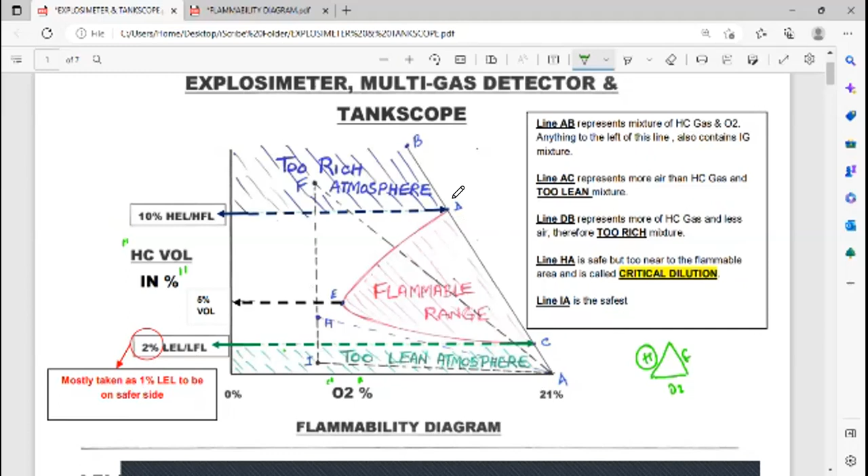So this particular point C, LEL, and point D, HFL, when you add that third gas, the third gas being IG - remember, anything to the left of line AB, going from this side towards the y-axis, contains this extra gas called inert gas, or IG for short. As you're adding IG, especially the tanker guys will know, we are displacing O2, and therefore you're going from 21%, 20.9%, moving more and more towards 0% of oxygen. IG is replacing the O2 in your tanks.

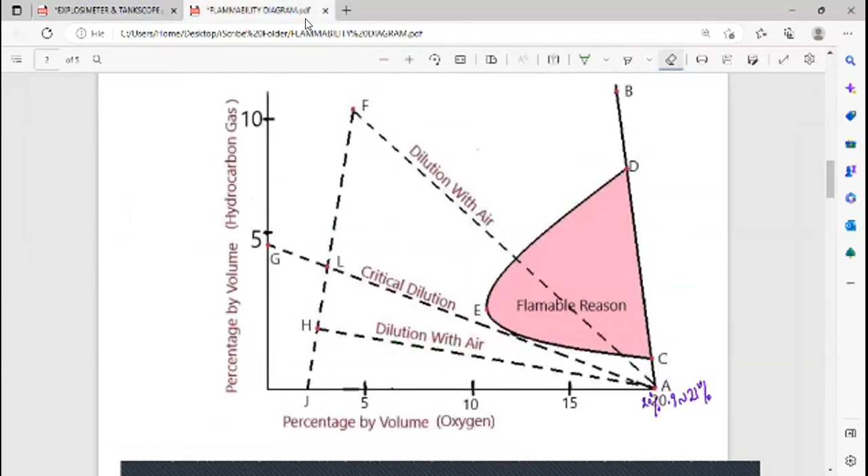Now, that is why I've drawn these two lines, and you'll see later on from the notes provided. These two dashed lines that I've drawn in my diagram, as you begin to add IG from 20.9, 21% of O2, as you're displacing the O2, what happens to these two theoretical lines? They are not actual lines, they are theoretical lines that have been drawn. As you keep adding IG, the dashed green line and the dashed blue line start curving towards each other.

Let me indicate them by this green arrow, and the one closest to dark blue, let's use this blue line. This dashed blue line will start curving in the downward manner, whilst the dashed green line starts moving upwards, this dashed blue line starts moving downward. As you keep adding IG, at about 11% - now this is not a very correct diagram - at about 11% of O2, both these lines meet at point E, where you're going to have 100% LEL.

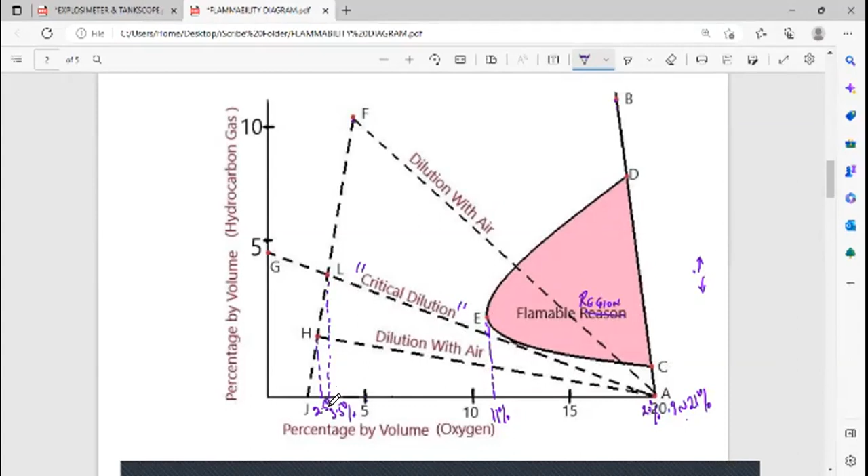He brings the IG down to point H, where if you're going to draw it down, say this is roughly 2.5% O2.

So from 3.5, he's reduced it further to 2.5%. And then if he introduces air at this junction, he is going to follow this line down to point A. Here I've named it as I, though as I said it should have been further to my left.

First and foremost, you're coming into it - here it is a little higher. You're not yet too much into that lean zone, too lean an atmosphere. But still, even if you're going to introduce air, then you're going to come into that too lean an atmosphere, and then you're free to put right up to 20.9, 21% O2.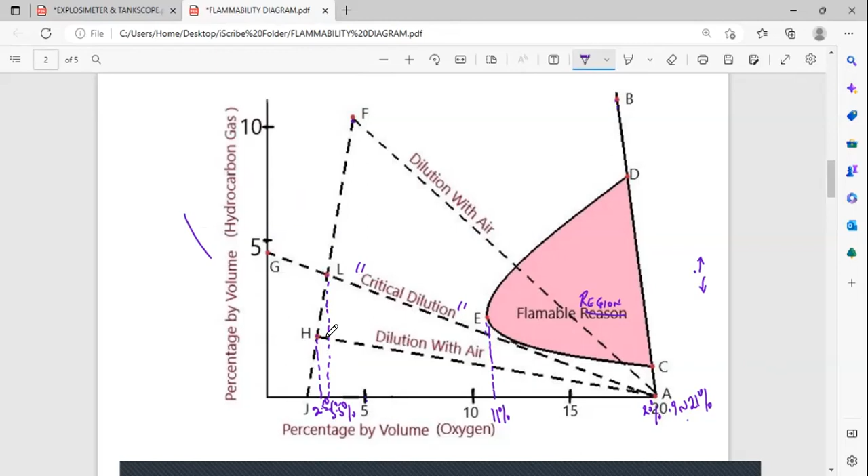You can then vent freely. So this would be the normal pattern that the chief officer is going to follow - line HA in this diagram, and in my diagram, it is going to be line IA. So this is the safest procedure that the chief officer will follow in order to prevent a fire and explosion.

Any queries or doubts on the flammability diagram? Anything troubling you with regards to understanding it, whatever I described? If you're having difficulty, I will explain it again, so please let me know before we move forward. Okay great, so I hope if any questions are thrown at you in the orals with regard to the flammability diagram, you'll be very confident in taking it up.

So why did we talk about this flammability diagram? We saw on the y-axis something measured in percentage volume. We also saw something called LEL, HEL. And therefore you have to have certain particular instruments to measure what is LEL, the flammable gas in a percentage LEL, and a flammable gas in a percentage volume.

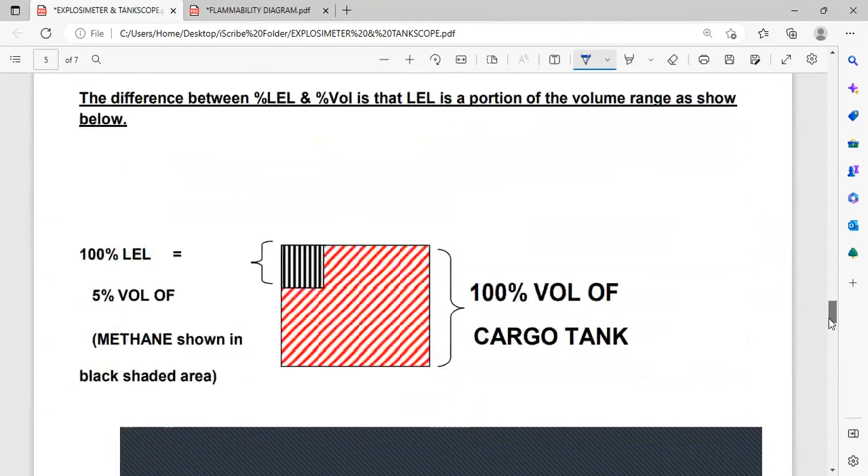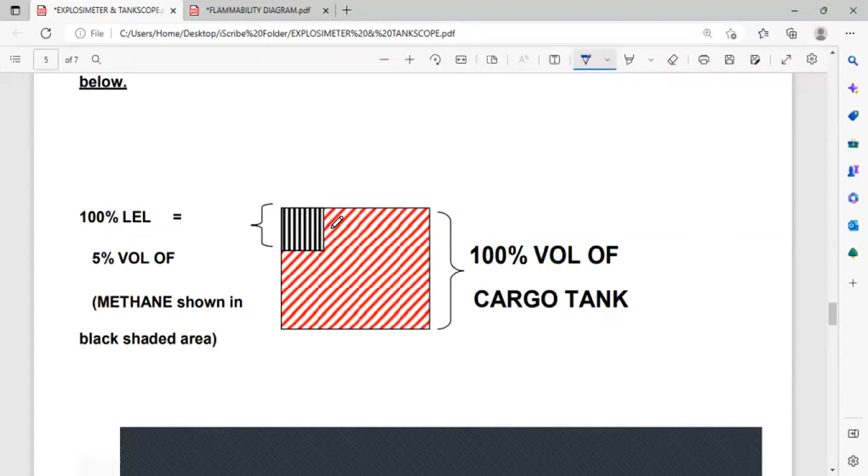Suppose this is your cargo tank carrying that flammable gas, and now it is full with that flammable gas. That tank is 100% volume. Of this 100% volume, this black shaded area is equal to 5% of this volume. It's not to scale, but let's say this particular shaded area is equal to 5% volume.

This 5% volume is equal to 100% LEL. And that 100% LEL is what? Point E, lying on that flammable curve, that flammable region.

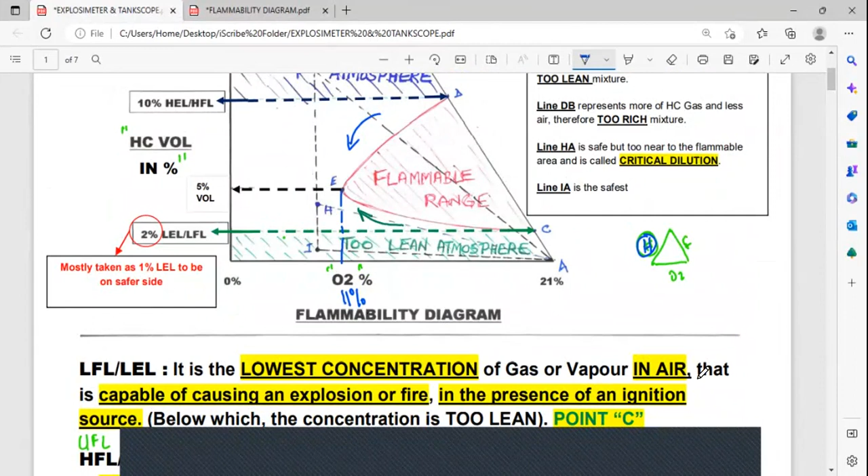It's putting you straight into that dangerous zone, because point E lies on this curve. You will definitely have a fire and explosion, because the amount of O2 is equal to 11%, and 11% is the minimum oxygen required in order to have a fire and explosion. Anything less than 11%, you are not going to have it. So that is the difference between percentage LEL and percentage volume.

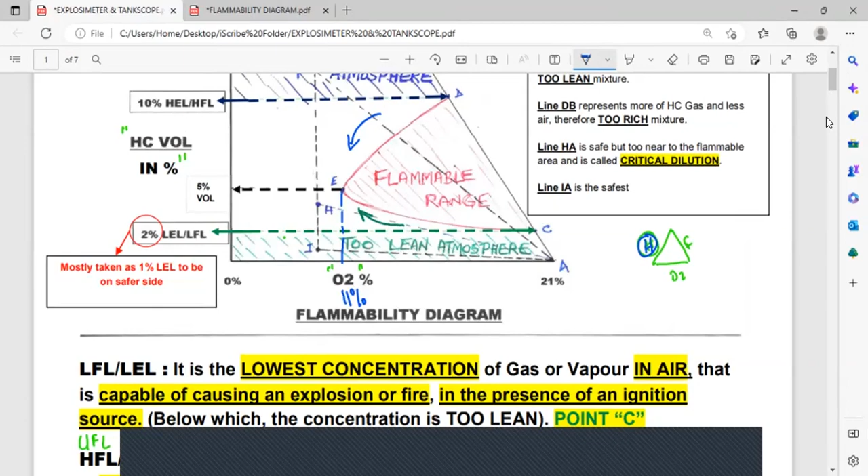Everybody clear? Any queries or doubts on this? Sir, can you repeat one more time please? Okay, percentage volume - percentage volume is compared to your cargo tank.

This is your cargo tank. The entire cargo tank will be taken as 100% volume, because you're going to load your cargo into that. They're always talking about volume over there. So this will be 100% volume of that tank.

Of that tank's 100% volume, if you take this shaded area, the black shaded area, which is equivalent to 5% volume, this 5% volume is equal to 100% LEL. And 100% LEL, we said 1%, 2% LEL, depending on which is the flammable gas. Hydrogen has 4% LEL. If you are going to have that same gas at 100% LEL, which is 5% of that volume, then you are definitely going to have a fire and explosion, because that corresponds to point E on this curve.

Okay, this is 100% of LEL, which is equal also to 5% volume of that entire tank that we are talking about. Since it is falling on this curve DEC, which is your flammable curve or flammable region, you will definitely have a fire and explosion. So that is the difference between your percentage LEL and percentage volume.

Understood, sir. Thank you. Yeah, okay.

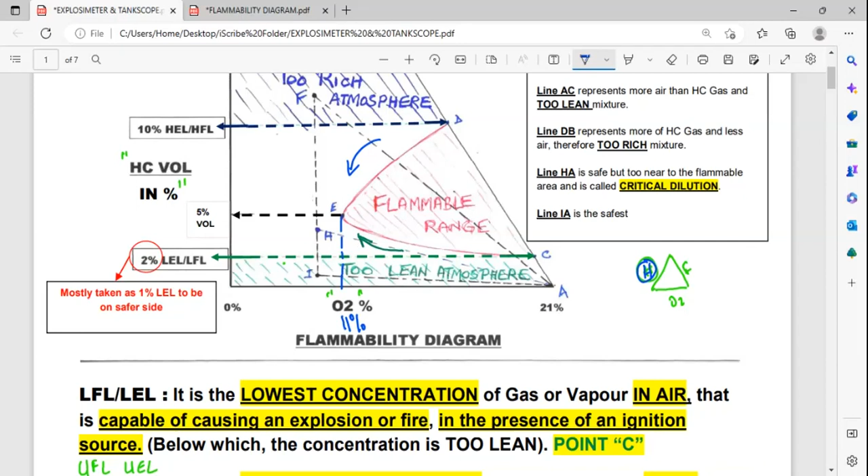Right, so we have very little time. Very briefly, we will move on to the explosimeter. The explosimeter is very commonly called on board the ship, but the more correct name is combustible gas indicator, CGI. Please note the word combustible, because that is what this explosimeter is going to be working on, the combustion of that flammable gas. Okay, so very quickly I'll go.

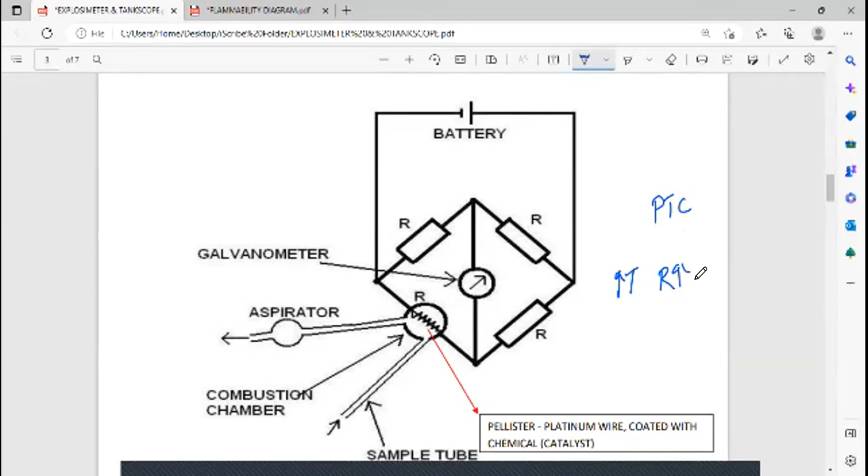Platinum resistance wire is a PTC element, positive temperature coefficient, meaning when the temperature rises, the resistance also rises, and vice versa - temperature falls, resistance falls. Because this is already heated up to a certain temperature - we'll see what that temperature is tomorrow - and now the gas has come, because of the catalyst, that gas is going to physically burn on this element.

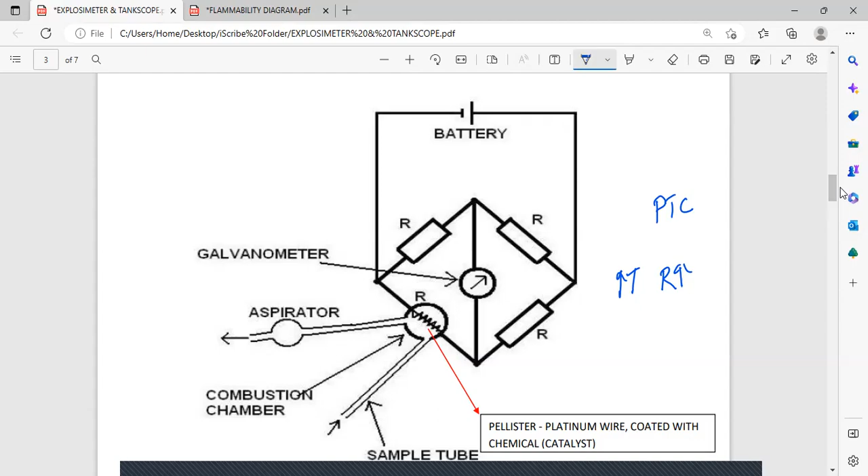That is why we said that this particular instrument is also called the CGI, combustible gas indicator. Please remember the word combustible. So that gas is going to burn over here.

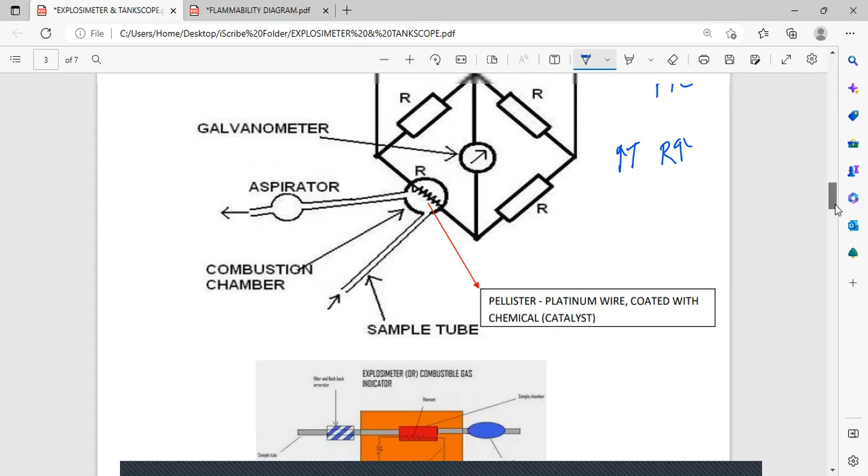Because of the burning of this gas, the temperature is also going to rise further than whatever temperature the chamber was at. Because of this change of temperature, the resistance is going to rise - remember, platinum is a PTC element. When it rises, it's going to be out of sync with these other three resistors, its value will be different. Because the resistance has risen, your Wheatstone bridge has become unbalanced.

Because the Wheatstone bridge has become unbalanced, a current is going to flow through the central arm. The amount of current that flows is directly proportional to the change of resistance, which in turn is directly proportional to the amount of flammable gas that is coming and burning over there. Therefore, your galvanometer, the meter in the middle, will be calibrated to give you the amount of that flammable gas in a percentage LEL value.